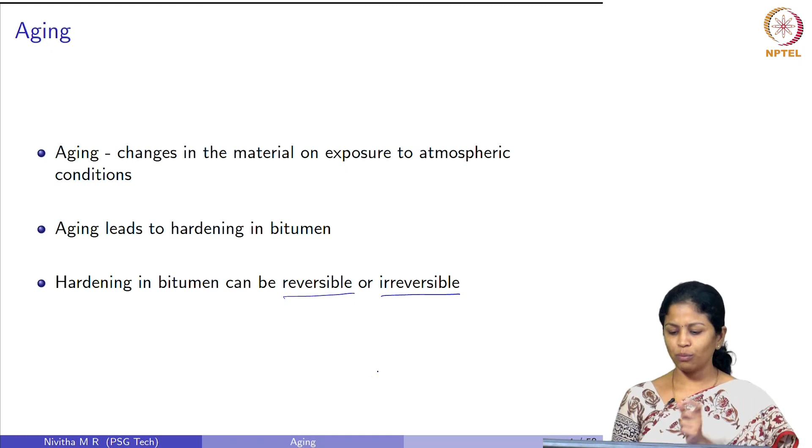So, this reversible hardening, we call it, occurs due to internal physical reorientation. So, what happens is that we said we have different molecules that are present in bitumen. So, these molecules try to internally reorient, they always strive for an equilibrium state.

So, these molecules try to reorient themselves in the internal microstructure of this material. This reorganization at the atomic level, molecular level, or micelle level is called reversible hardening. We have seen, when we were talking about the chemical composition of bitumen, we explained it in different stages. We talked about the atomic scale, then the molecular scale, and then the micelle scale in the colloidal model of bitumen.

So, in any of these scales, it can undergo some kind of reorientation, which is called reversible hardening. We should note here that there is no material loss and no change in chemical composition because of reversible hardening. It is only some reorientation of the molecules.

Irreversible hardening occurs due to the formation of oxidation compounds. So, here there is formation of new compounds, and there is change in chemical composition in addition to loss in material. So, this is irreversible hardening.

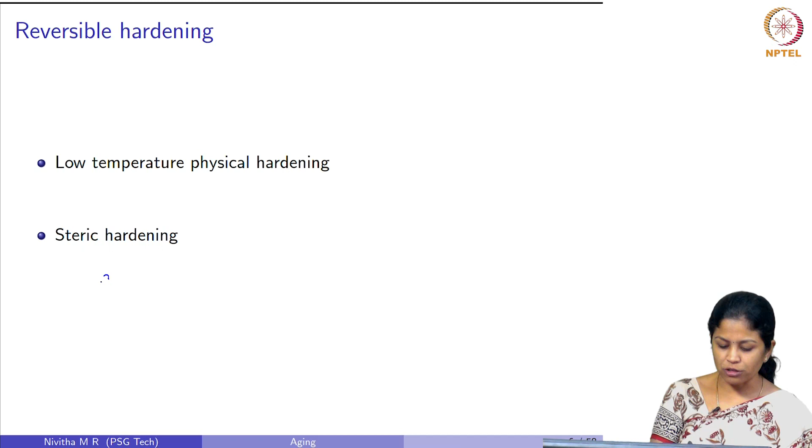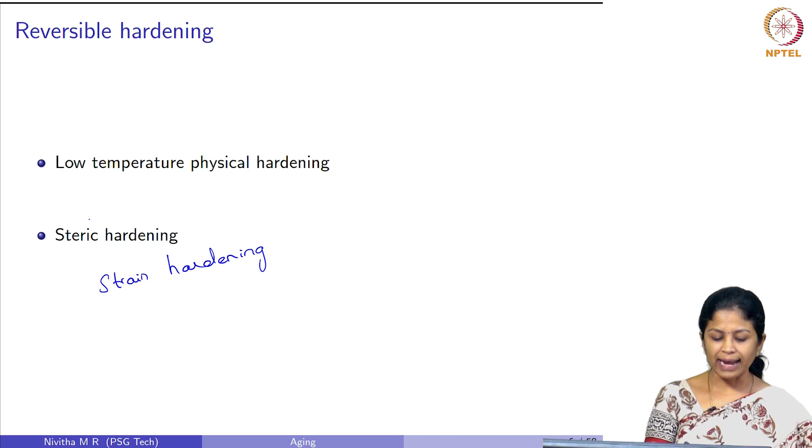Now, there are types of reversible hardening which we can observe in bitumen. Actually, there are three types: low temperature physical hardening, steric hardening, and strain hardening. In this lecture, we will confine ourselves to low temperature physical hardening and steric hardening alone. So, what is low temperature physical hardening? As the name suggests, it occurs at low temperatures.

When we reduce temperature from high temperatures, the molecules will try to reorganize themselves to attain an equilibrium state. We can explain this in terms of a free volume concept. So, what is this free volume? We have a space in which the molecules are present. The total volume is composed of the occupied volume plus the free volume.

If I take a unit space, some points will have molecules present, and there will be some spaces because of irregularities in these molecules. So, we have occupied volume and free volume. As temperature reduces, the free volume also keeps reducing, in accordance with the rate of temperature reduction. But when the glass transition temperature is reached, suddenly there is a reduction in molecular mobility. The molecules no longer reorganize at the same rate as the temperature drops, so we see a lag in their reorganization.

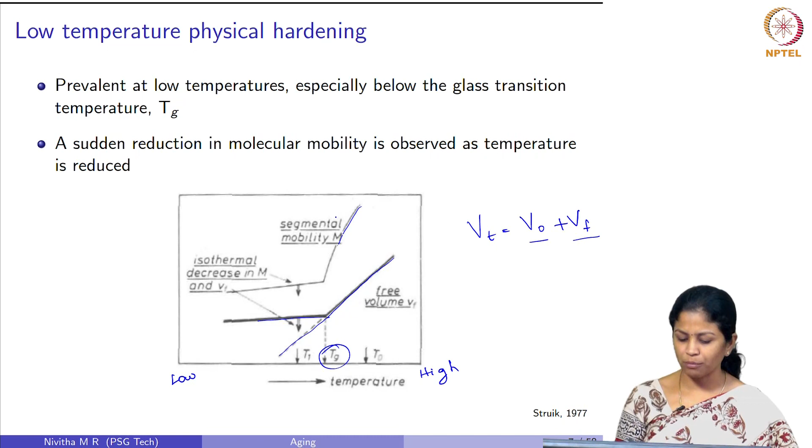This graph shows the molecular mobility. The molecular mobility keeps decreasing in accordance with the free volume reduction. After the glass transition temperature, a reduction in molecular mobility is observed, and this leads to a lower rate of reduction in free volume.

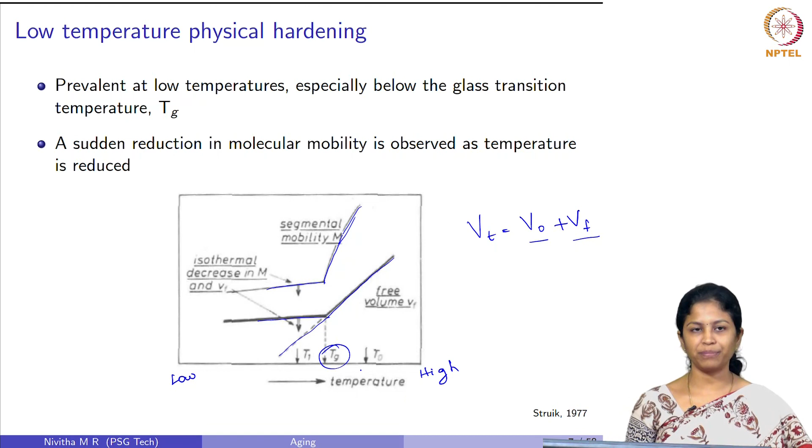So, what is the consequence of low temperature physical hardening, and why are we interested in it for bitumen? In the glassy state, the hardness of bitumen increases substantially and its ability to relax stresses reduces. This is very important for pavements when the temperature falls below the glass transition temperature. This may not be very common in India, but imagine countries like Canada, where pavement temperatures can reach -30 or -40. Generally, the glass transition temperature of bitumen is roughly -20 degrees Celsius. So, when the pavement temperature falls below it, low temperature physical hardening happens.

So, the hardness in material keeps increasing though the temperature is maintained constant, right. So, this is the impact of low temperature physical hardening, and people have quantified this impact of low temperature physical hardening. So, this is the study by Lu and Isacsson.

What they have done is they have considered a bitumen of type E and they have tested it at 3 temperatures: -15, -25 and -35 degrees. So, they have measured the hardening index. So, what is this hardening index? This hardening index is nothing but the ratio of stiffness at some time t divided by the stiffness at time 0. So, let us take the temperature -15 degrees Celsius.

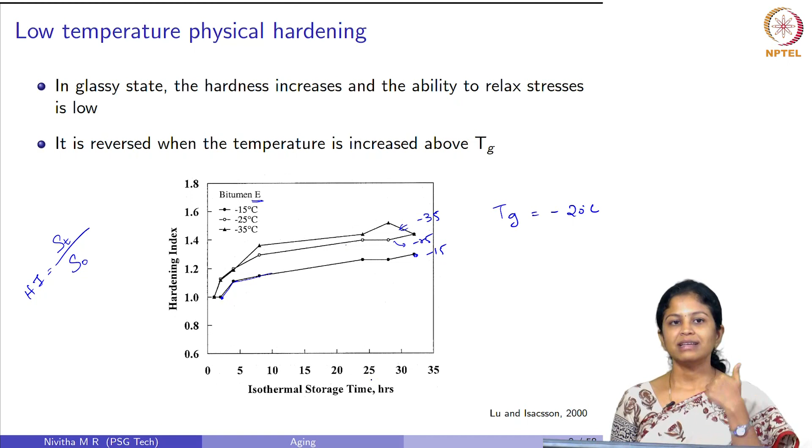So, we have seen that the material has stiffened, right, about 1.20 times increase is observed when it is stored for 30 hours. Now, we take this material and slightly heat it above its glass transition temperature. Then what people have seen is that it reverts back to its original state. So, this is completely reversible, and to reverse it we need to take this material slightly above its glass transition temperature. The next phenomenon is steric hardening.

People say that steric hardening actually occurs at room temperature, and that it occurs due to a similar phenomenon to how low temperature hardening is observed, but there was no proof related to this. So, we will just see what steric hardening is. It is developed when bitumen is stored at constant temperature. We said low temperature physical hardening occurs at constant temperature. Similarly, steric hardening also occurs at constant temperature. This phenomenon is also because of internal reorientation of molecules and there is no deformation.

So, this steric hardening also increases with time and it attains a steady state. It does not mean that if we keep storing this material over a long period of time, it will keep increasing in its stiffness. It does not happen that way. So, if this is stiffness with respect to time, time means isothermal storage time, right. So, if suppose this is the initial stiffness, it might slightly increase and then it will try to remain constant, right. So, this is the effect of steric hardening.

So, this was measured by an interesting experiment which was conducted by Brown, Sparks and Smith. What they had done is that they had taken a bitumen in the form of a cylinder 25 mm in diameter and 100 mm in length, and subjected it to an extension test at different curing periods. They had calculated the percentage extension. So, what is this percentage extension? It is change in length over the time period over which the extension was applied.

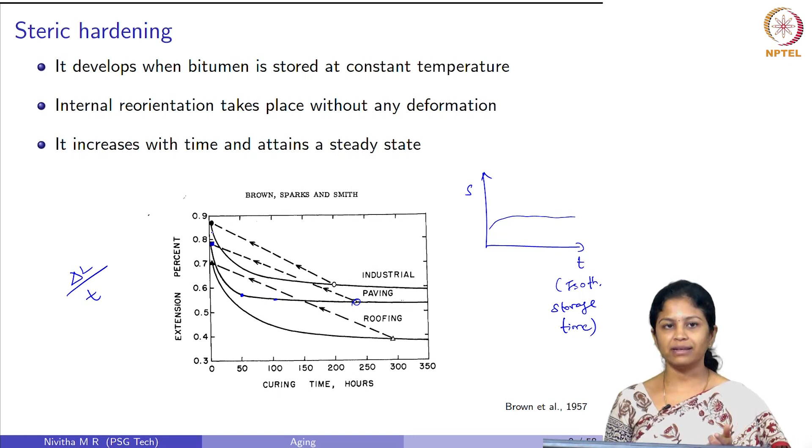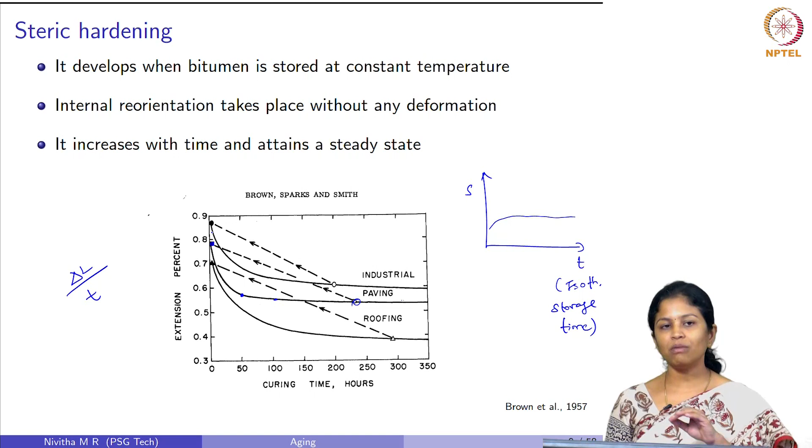So, once this material was heated, this time is now reset to 0. At 0th time they have again measured the extension percentage. You can see it has reverted back to this initial value. The same value was obtained after the material was heated. So, similar to the case of low temperature physical hardening, when we heat this material to a particular temperature, this effect of steric hardening is removed and the material now completely reverts back to its original state.

So, that is what is said, when bitumen is heated beyond temperatures greater than 70 degrees Celsius, it reverts back to its original state and the effect of steric hardening is removed. Now, why is this important to us? We obtain bitumen from refinery, we store it for considerable period of time, and then we take this material and do some tests on this material, right. So, in that state the material is considered to be in a transient state. So, we have to revert back this effect of hardening.

So, when it is stored at isothermal temperatures, it has a tendency to form steric hardening. So, we need to revert back this effect of steric hardening, only then the material is tested in its original state. So, that is why it is required to condition the sample before we do any test on bitumen. So, if we see some tests like viscosity, where we heat the bitumen to pouring consistency, we heat it to temperatures of 90 to 100 degrees Celsius. So, at those temperatures the effect of steric hardening is automatically removed.

So, we actually heat it to pour it easily, but we should remember that we are doing something else also in that process. We are removing the effect of steric hardening. Now, if there is some test in which you do not have to heat the sample to pouring consistency, then in those cases we have to condition the sample before testing. So, how is this sample conditioned?

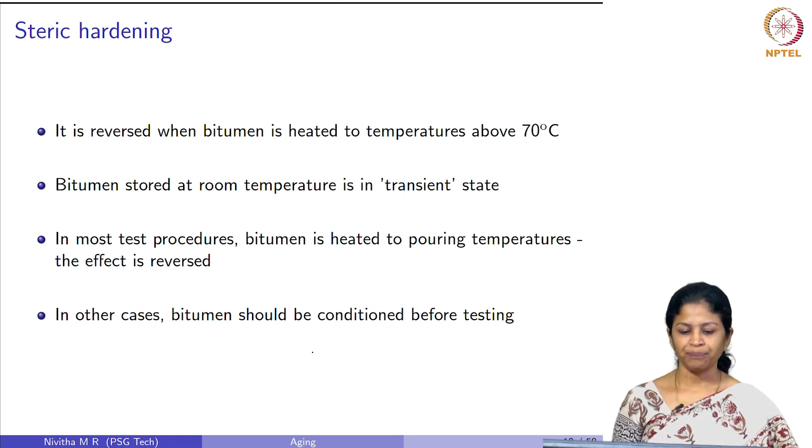You take some amount of sample, you keep it in a constant temperature water bath, say roughly around 70 degrees Celsius, keep it for half an hour. Then take that material and conduct any test that we want. So, by this process we are removing this effect of steric hardening in bitumen. So, it is very important to remember this when we are doing any tests on bitumen. Next, we move on to the irreversible hardening.

This irreversible hardening is referred to as chemical aging or simply aging, right. So, when people say aging, they refer to this irreversible hardening or chemical aging that happens in bitumen. So, this chemical aging is an inevitable phenomenon, and it is also an irreversible phenomenon. Like I said, we subject the pavement to environmental conditions, it oxidizes, it undergoes a lot of other processes, it ages.

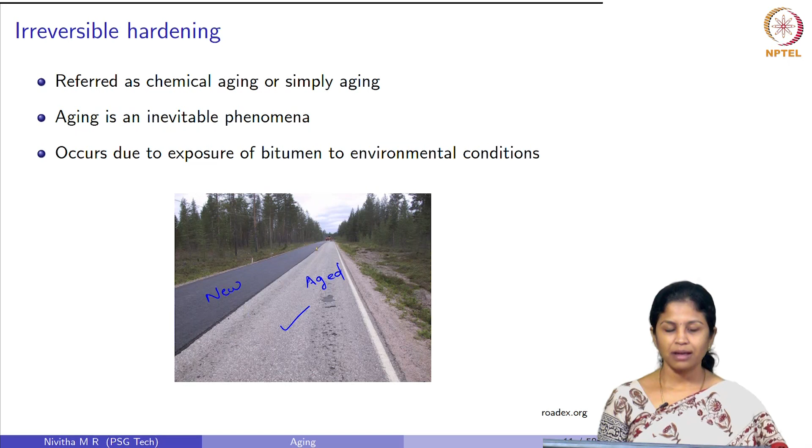We can see a pavement here, the one on the right side, right, this one is an aged pavement and the one on the left side is a new pavement. We can see the appearance of an aged pavement, it is dull grey in color, it has lost that shine, whereas a new pavement is fresh, black in color, it has that shine in it. So, the effect of aging actually reduces this shine in the material, and you can actually distinguish a new and an old pavement by this color. Now, let us look in detail at chemical aging.

So, Traxler has listed a number of factors which are responsible for chemical aging in bitumen. So, you can see this table here, there are about 15 factors which are listed here, he calls them effects, and each of these factors can be influenced by a number of parameters. So, what are these parameters that are listed here? One is time, second one is heat, oxygen, availability of sunlight, and beta and gamma rays.

And he has also said, because of each of these effects, where does the aging occur? Some factors will cause aging only on the surface of bitumen, whereas some factors will cause aging in the entire mass. So, that is also listed in this particular table. The first effect is oxidation.

So, what is this oxidation? This is a very common term which we would have heard in different perspectives. So, oxidation is absorption of oxygen and formation of oxides. So, that is the oxidation process. So, this oxidation is listed here as to occur in dark, right, in the absence of sunlight, but with the availability of oxygen we can have an oxidation process.

So, this oxidation process is influenced by 5 parameters, and here for this particular case there are only 3 parameters that influence. One is time. So, if the material is subjected to the availability of oxygen for a longer period of time, then there is more aging. Similarly, heat, when it is subjected to oxidation in the presence of elevated temperatures, then the rate of oxidation is higher. Similarly, availability of oxygen, if there is more amount of oxygen available to this material, then there is more oxidation happening in this material.

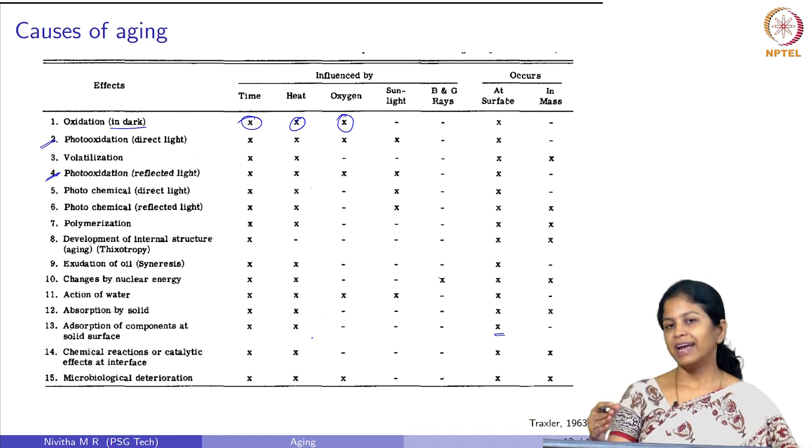So, these are some of the effects which will lead to aging in bitumen, and are influenced by various parameters. It can occur either at the surface or at the inner portion of this material. But here for bitumen there are two predominant factors which people have observed and which have led to aging in this material. The first one is the loss of volatiles, and the second one is the uptake of oxygen, that is nothing but the oxidation process. So, people have said that these two are the predominant factors in the case of bitumen. In fact, oxidation is even more predominant compared to this loss of volatiles.

We do not want more amount of volatiles to be removed from this material. We will see when we talk about the specifications, they have a limit on how much volatile should be removed from bitumen. So, there is also adsorption of lighter fractions, like I previously said, on the surface of aggregates. So, for all this process, temperature acts as a catalyst. So, we have influence of temperature at different degrees in different stages of a pavement. During construction, the effect of temperature is something else. During service in field, the effect of temperature is something else. So, in one way or the other, temperature acts as a catalyst to this aging process.